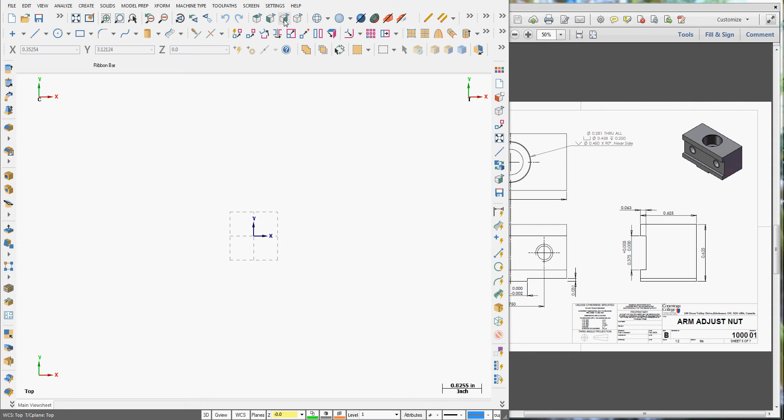I've started a new part in Mastercam. I'll set the color I want to create my geometry in, and set my line thickness. I'm going to start creating the geometry in the right plane, so I'll tell it to look at the right side. That'll set the construction plane to right as well.

My Z is 0, and we'll create some lines. I'll activate the line, start here at the origin, give my line the sense of direction, and allow the horizontal line snap.

Click to place the line. Come up here in the length field and make it 0.625, and press enter. Now I'm going to make this vertical line, and its length is 0.625 minus 0.031.

We'll start here at this endpoint, give it the sense of direction. Because I've given it the sense of direction, I don't need to put the negative in my equation. I can just put 0.625 minus 0.031 and press enter.

I'll now go from here back in this direction. Again, I want to make a line that's 5/8 long. I've already entered 5/8, so it'll be in my drop-down menu, and I can apply that.

So let's fit the geometry to the screen. I'll roll my middle mouse button to zoom out a bit. Now I'll start up here.

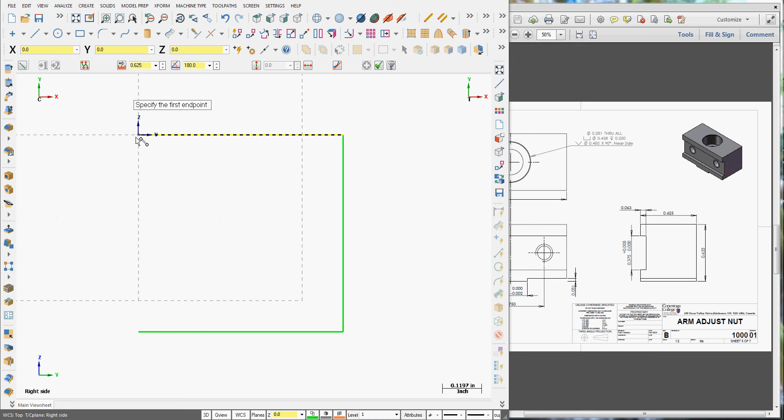Give it the sense of direction. But how long is this? The drawing's not the clearest, but this 3/8 slot is on center. So again, its length is an equation: bracket 0.625 minus 0.375 bracket divided by 2, or 1/8.

So I'm happy with that line. I can start from this endpoint, now do a horizontal line. It will be 63 thou in length.

Again, start from this endpoint, give it the sense of direction, and this time we want a 3/8 line.

Start from this endpoint, give it the sense of direction. I want the 63 thou again, so I'll choose it from the drop-down menu. I can press enter, and my last line closes the geometry off, and accept that.

So right now, this is in my right plane. I want to extrude it for 1.25 inches. So to extrude it, I'm going to select X form, translate.

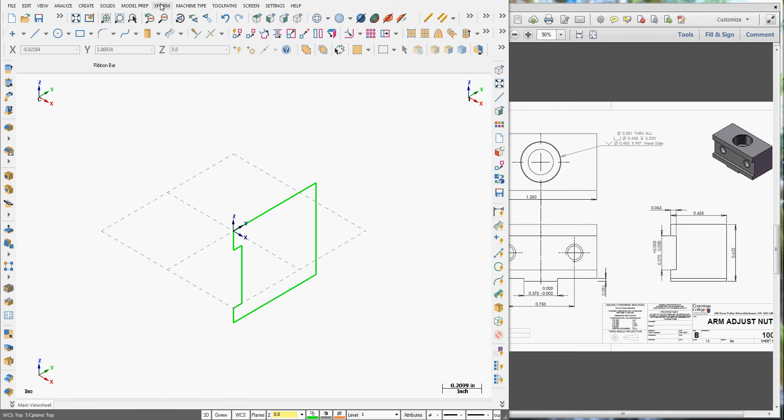I'll window select all of my entities, press enter to end my selection, and in the delta X, I want to translate 1.25 inches.

We'll enter 1.25. It's going the wrong direction. I want it to go the other way, so I'll flip it and say OK.

I can clear my screen colors now, or just continue and clear them later.

The next step is to create this little tab in the front view. I'm going to keep looking at my part isometrically. I'll fit the screen, and then zoom out a bit. So I want to switch my construction plane to the front.

So I'll go Planes, Front, and I can see now my rectangle. It shows me I'm working in the front plane from here. I'm going to create a line.

31 thou from the midpoint of this line. So we're going to activate line, snap to the midpoint, come straight down, and set its length to 31 thou, and accept that.

Next, I'm going to use my line parallel. I'm going to select my little line, move to one side to give it a sense of direction, and the distance is half of 3/8, so we'll put the equation in up here, 0.375 divided by 2.

Then I'll use these arrows to offset it in both directions. I'll accept that, and I don't need this line anymore, so I'll select it and delete it.

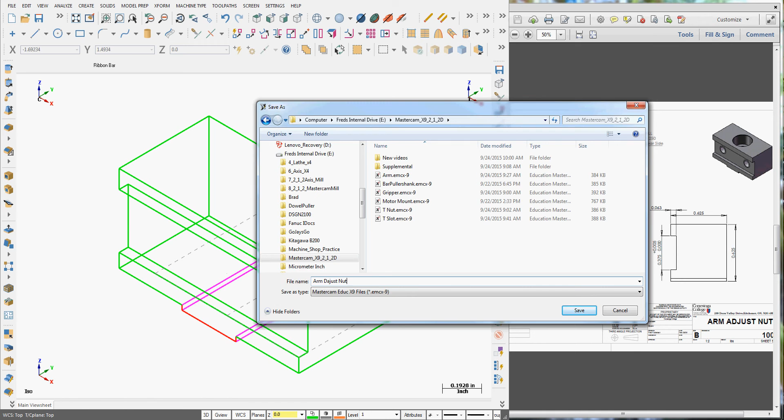This is called arm adjust nut. Navigate to where you wish to save it and give it the name. Looks like I spelt it wrong. Oh well. So next I need to create some holes.

I'm going to switch back to the front construction plane, but still look at it isometrically. I want to change my Z depth, so I create these holes at this depth. Right click in the Z field, choose Z coordinate of a point, and choose any geometry at the proper depth. You'll notice I'm now at negative 63. Here's my 0, 0, so everything is going to be in quadrant 3.

I have two holes symmetrical about the center of the part, 3/4 of an inch in distance. I have several ways I can create this. So I'm going to start this time by creating some lines.

I'm going to create a line from the midpoint of this line to the midpoint of this line. Then I'm going to create a line from that midpoint horizontally in this direction, and I'll make its distance half of 3/4. So the distance will be 0.75 divided by 2.

And then I'll do the same thing in this direction. So I'm creating geometry that I'm going to delete later. I'll say OK. So now I create my holes. I need a circle. Size isn't too critical. I'm going to drill these 0.15 through and then tap them. So I'll create a 0.15 diameter circle.

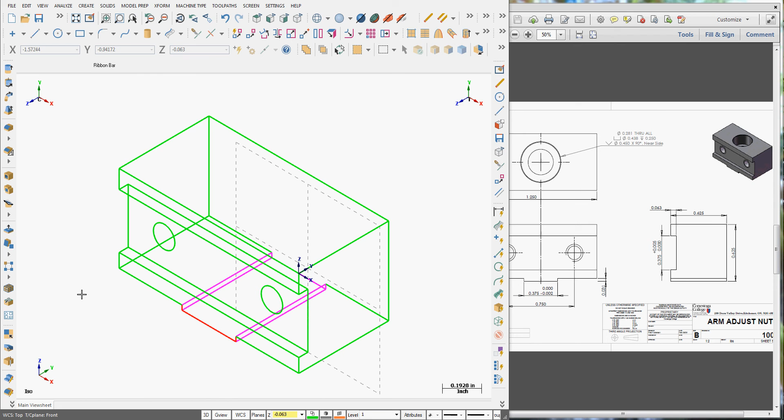Selected everything I wish to delete. I'll press enter to stop my selection and delete the lines. I'll repaint everything to make sure it's good. And if I want, I can extrude these through the part as well.

We'll go back to the isometric view, say XForm, translate, select my two entities, enter to end my selection. We want to go in the Y, and the distance, well, let's do an equation again. It's negative 0.625 plus 0.063.

It's going the wrong way. Not a problem. Flip it. We'll say OK and have a look at our part.

So back to our isometric view. I'm in the top plane. I want to switch my Z construction depth to the top, and I want to create this counterbore hole, diameter 0.438 in the center. So again, to make it easy, I'm going to create a line from the midpoint to the midpoint.

I'm going to create a circle. We'll unlock the size, and I want it starting at this midpoint, and its diameter is 0.438. I'll say OK. Delete my construction geometry.

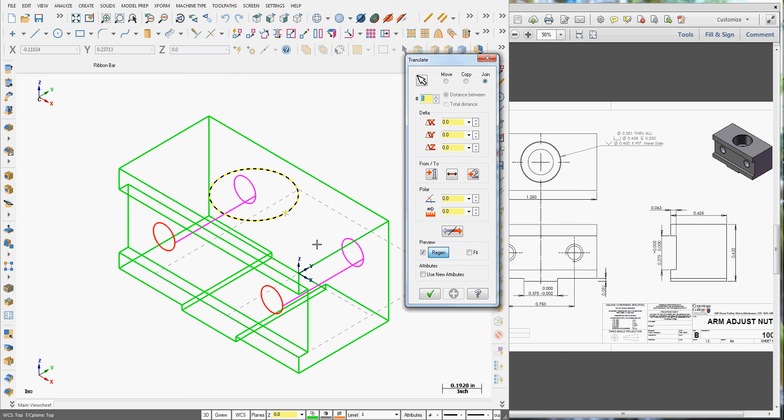So I selected the line, pressed delete on the keyboard, and I'm going to translate this entity in my Z 1/4 inch. So we'll enter 0.25. We're using the join command. Flip the direction. Say OK. I'm going to set a new Z construction depth down here.

Now I'm going to create a diameter 0.281 circle. So activate circle, and I want this to snap to the center of an arc. So at the center of this arc, I now have created a circle. Its diameter is 0.281. And I can accept that.

And if I wish, I can translate it through the part. So I'll pre-select the geometry, choose X-form, translate. We're going to use the join. Again, I'm going in the Z, and I'll put in the equation.

So 0.625 minus the 0.25 of the counterbore. I can click in another field and it'll calculate it. It's going the wrong direction. We'll flip it. We'll say OK. And my part is done.

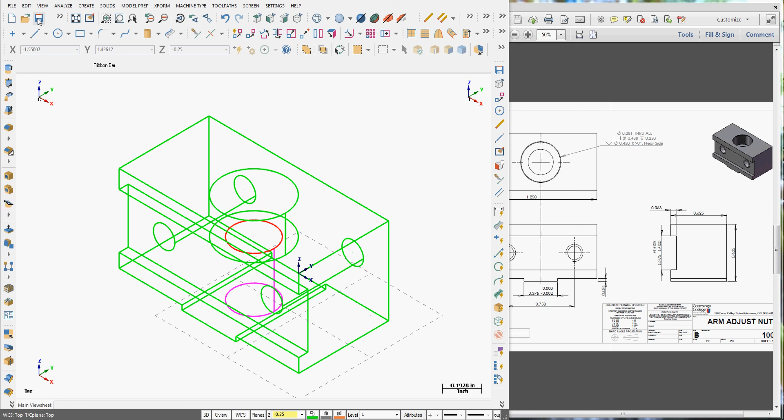So I want to go back to the isometric view and save my part.